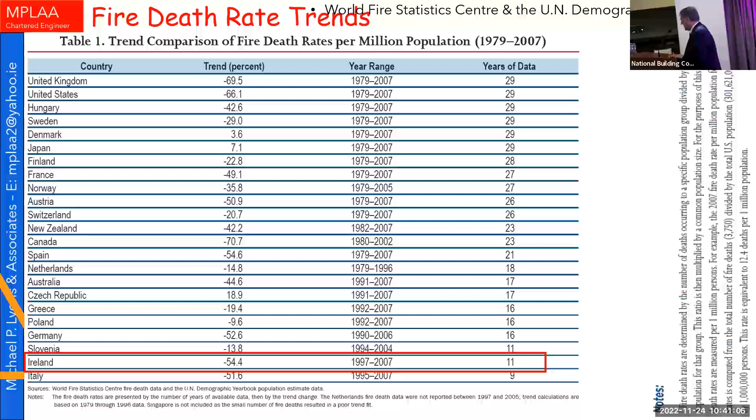Now, background to all of it is that we have our National Fire Safety Week, and as David Carroll referred to, there's a lot of emphasis on reducing the number of fatalities due to fire, and it's having very, very good positive results, even to the point that there's now a European approach to it, and there was a European Fire Safety Week on last week. The European Commission, while fire safety is a member state competence, is looking at ways of developing a pan-European approach, and do pay attention to it.

There's a group called the European Fire Safety Alliance that is organising that whole area, and it's very much complementary to the type of national fire safety guidance we're promoting in this jurisdiction. But the main dominance, of course, in terms of fire fatalities is dwelling fires.

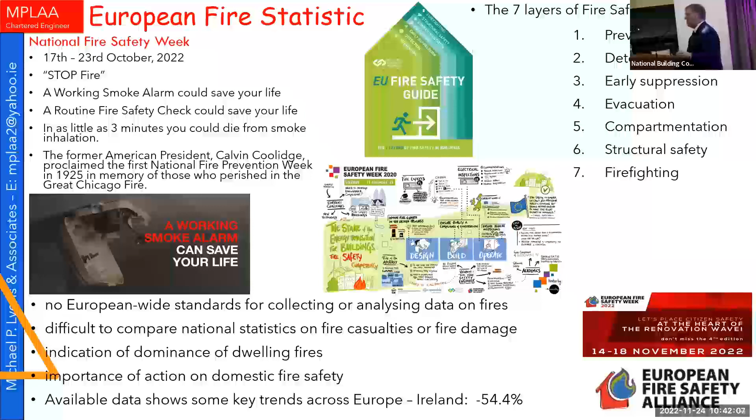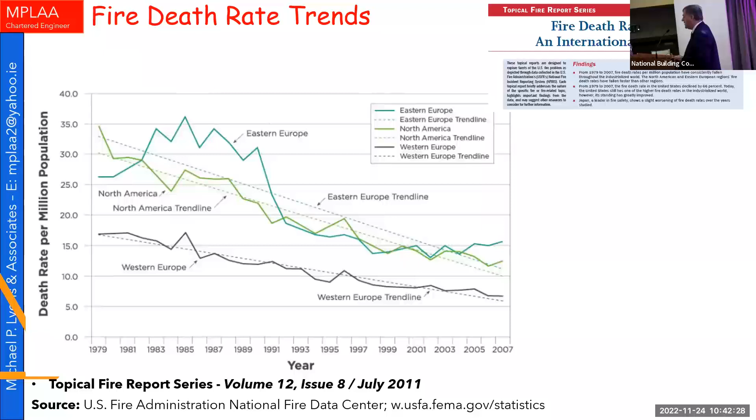The vast majority of our fatality statistics are not in commercial buildings, they're in dwellings, be it dwelling houses or non-dwelling house dwellings. And overall, even worldwide, the feedback is that the fatality rate is reducing all the time, and those statistics are taken from international trends produced in the US and even by the UN.

So it's important from our point of view to note that we are actually having a positive effect, and all of the increasing standards in terms of fire safety that have come in since 1992, 1998, 2006, again in 2017, and even the changes most recently in 2020 with open plan flats -- they are actually having a positive effect. The importance is for us to keep going in that direction.

The NBCO set me a very broad smorgasbord of issues to address in terms of fire safety strategies.

In the time that's going, I will be skirting through each of the 5 principal areas. It's going to go from means of escape right through the 5 principal issues in terms of fire safety design and fire safety construction, B1 to B5.

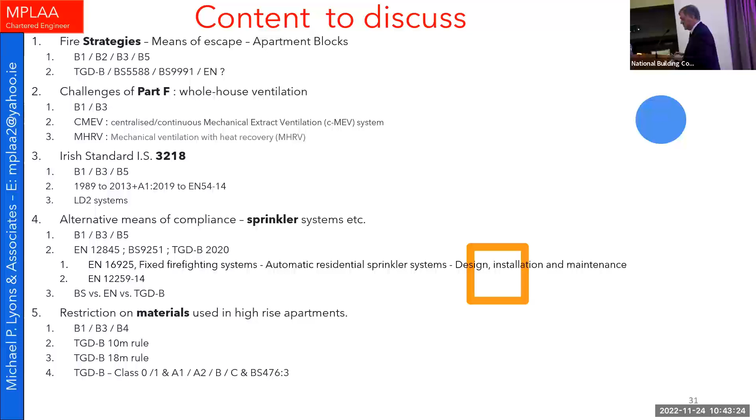We have our 2 guidance documents. The Act has evolved over the years, and there's even doubt as to what does or does not need a fire safety certificate. That's why it's important for all of us to attend these types of presentations, so those kinds of questions get out and the basis for the answers needs to be understood. We now live in an industry where there's 2 guidance documents, one for dwelling houses and then one for dwellings that are not dwelling houses.

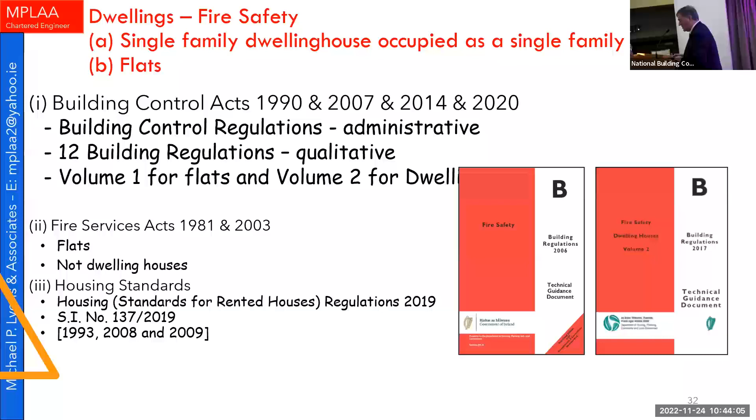It's interesting that the provisions for fire safety that do apply, for a 2-story house, one can jump from a 1st floor window as long as the floor of the bedroom you're trying to get out of does not exceed 4.5 meters off the ground. You can still hurt yourself, but in terms of complying with the building regulations, and the guidance that feeds into them, there is a limit.

In 1998, we brought in the obligation to have an escape window in all dwelling houses as an upfront obligation. Then in 2006, we reduced the size of the escape window because we're following British standards. It's important to note that our guidance is very strict in relation to the fastenings of those escape windows, and it's the details where things go wrong.

I think that's where a lot of building control officers need to pay their attention to, is to be familiar with the actual little details and to insist there's a positive confirmation that the designer is going to comply with those details. Pay attention to the paragraphs in the different guidance documents, particularly in the dwellings guidance document. If you can't open a window, you can't escape through the window.

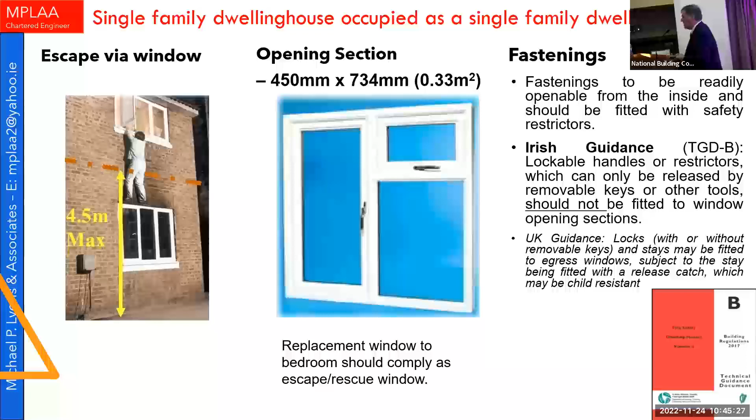Just a point in relation to attic conversions: the window out of a 2nd floor story is an assisted escape window. There's no expectation that the person is going to jump 6 meters from the eaves to the ground. The intention is that some external assistance, presumably the fire brigade, but it could be your neighbors or somebody in the household themselves, helps the person who is effectively trapped in the attic room, because why are they going out through a window in the roof space if they're not trapped?

Their alternative is to go down the main staircase of the house. You would assume that's what people would do. So if they're not able to use the first primary means of escape, they're going to use the secondary means of escape. But it's a rescue window for assisted escape because of the height that the person's going to be, generally anyway, above the ground.

That's why, as Owen referred to, there's that often forgotten obligation to have space underneath the window for a ladder. But you've also got to get the ladder into that space. We've got to be careful with what we allow, as rear gardens that don't have the facility for a ladder to be brought to the back of a house. You've got to question the means of escape concept being applied to the house if you're relying on assisted escape from an attic converted window.

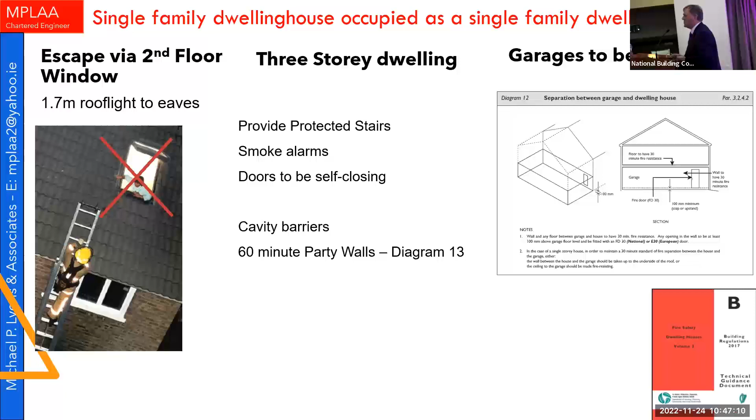As I say, we might have a lot of questions by the time we get to the roundtable talk, so I'll invite any queries that you may have.

One of the things that has also changed, particularly since 2020, is that for the first time we actually have an obligation that there must be a domestic sprinkler installation. We haven't had that before in dwellings. Now, it applies where you've got a 4-story timber-framed house, but it is now in our guidance. Other jurisdictions have brought in domestic sprinklers - Wales, for instance, have done it.

An awful lot in North America have done it, but we've been reluctant to start looking at it as an obligation. It has come in for open plan flats, and I'll come to that as we go through the other slides. But that whole area of bringing in an engineered solution to deal with shortcomings perceived when a fire occurs is available to designers.

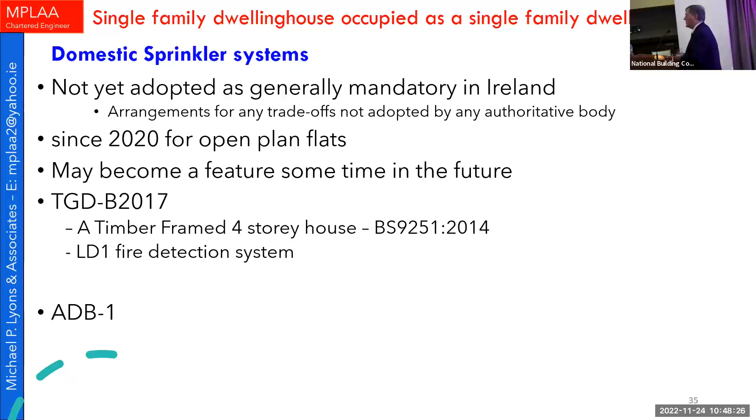Building control officers are going to be challenged to agree to those designs going forward as well. It may become an obligation in the future, but for the moment anyway, when it comes to domestic sprinklers, it's either open plan flats, elongated escape routes, or for domestic houses, it is timber framed 4-story houses.

So one of the things is just the very word dwelling - is dwelling house defined? It's in the technical guidance, but is it in the actual regulations themselves? What's a dwelling from a legal point of view if it's not in the building control regulations? And what does that mean for us?

It's very important to note the definition of flat. I think that's what goes to the answer to the question about the fire safety certificate. A flat is a dwelling that is horizontally separated from something else that's not part of the dwelling. And if that's the situation, automatically you're obligated to get a fire safety certificate.

I can remember when I was a fire officer, the shock on one person's face when she realized that the house she lived in was actually a flat, legally speaking, because she had her shop underneath her dwelling. It was a dwelling house in the 1800s, but it ceased being one when a commercial unit was converted into the actual dwelling house. So it became a dwelling over a shop - ergo, it was a flat over a shop.

People don't like their penthouses being called flats or their duplexes being called flats, but under the Building Control Regulations, they're just flats - dwellings which are horizontally separated. So you get into this thing of compartmentation. And again, that opens up the conversation about strategy, fire safety strategy in terms of design and compliance, and it starts to answer a lot of the questions that people will ask.

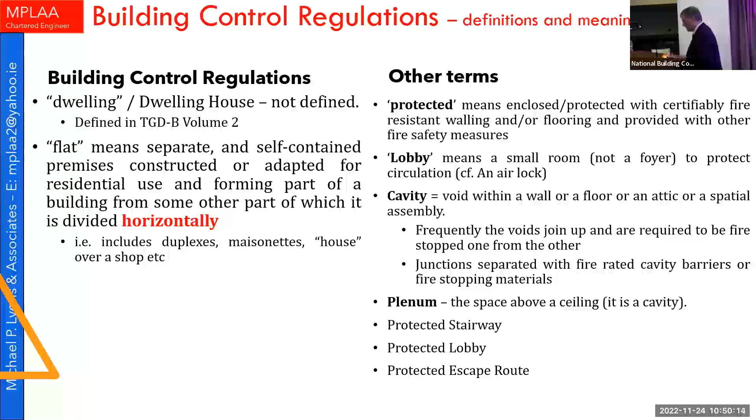One of the first things I always advise everybody to do when you start looking at fire safety strategies is to draw out the basic means of escape obligation - what you're proposing, or what somebody is trying to convince you to agree to - and characterize it in a descriptor. For example, a 5-story over basement block of flats with a single stairwell and with protected lobbies.

There's a bit of a shine on the - can we do anything with the shine, you know? Anyway, so you've got your enclosed stairwell that goes from ground level here all the way up to the top flat. And then there's a protected lobby box between that single stairwell and a fire in any one of those flats.

So your basic strategy is this: if this goes on fire, the fire's got to burn out of this box, it's got to go through your protected lobby, and then it's got to get into the protected stairwell that all the other users make use of.

The other basic thing to keep attention on in your strategy is that your basement is separated from the vulnerable single escape route. Because the fundamental concept in most fire safety design is that there's an alternative means of escape - I'm presented with a fire, I turn my back to it, I walk away from it, I can go somewhere. But that doesn't work everywhere - you have to end up having single escape routes, so our strategies have got to be able to deal with those.

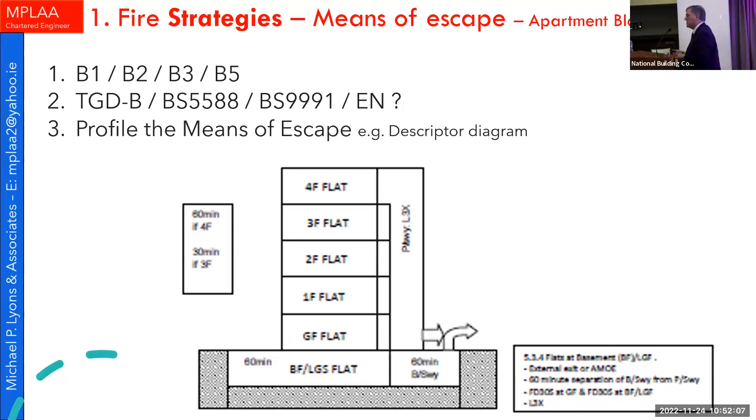In the future, there may be a European-wide standard that will replace all of those regardless anyway. So in terms of the volumes and guidance we're following, currently it's Technical Guidance Document B - the prima facie route - Technical Guidance Document B plus BS 5588 Part 1 as your strategy in terms of fire safety for flats. And BS 5588 Part 1 is from 1990.

Flats and designs and materials and facilities and complications of apartment blocks, and even housing estates, have become far more complicated, and the issues that arise - a lot of things aren't mentioned in it. A lot of designers are using 9991, and a lot of building control authorities are agreeing to allow for it as well, as long as it's used in its entirety. Appeals to An Bord Pleanála are regularly based on arguments about the guidance in 9991.

So there are issues that do arise that have to be addressed. The biggest one, I suppose, really is the 10-meter rule for us to pay attention to - Ireland has this requirement that compartmentation above 10 meters must be in non-combustible materials.

And you can't get around that. That is the Irish state through TGDB saying this is the standard you must comply with. So you can try to go over to use Approved Document B or something else to get around it, but An Bord Pleanála hasn't allowed that.

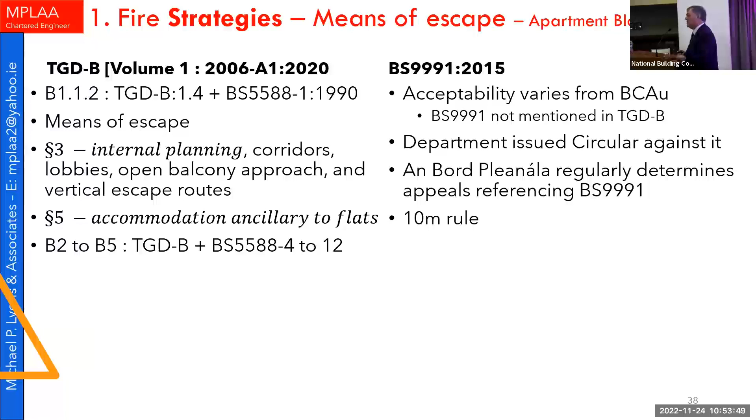In terms of basic design, a fire occurs in a room. It's got to get out through the doorways, into the corridors. You've got to protect your corridors, stairwells, and entrance hallways - they're all spaces for the products of combustion. When I say fire, I mean fire, smoke, heat, toxic gases, all the products of combustion. We deal with it by having these spaces with fire doors to protect the single means of escape.

In terms of specification and construction, we have to ensure that what was intended by the test performance of the products is delivered on site, and what has been promised by the manufacturers is able to be delivered by the construction team - not alone just the design team, it's the construction team as well.

I always point out that in the building regulations it's a twofold obligation. When somebody says something is compliant with building regulations, they're saying it's compliant in terms of design, but also compliant in terms of construction - it's both design and construction. So if you as a building control officer are agreeing that something is compliant, you're agreeing that both the design and the construction comply with the building regulations. It's an interesting clarification just to pay attention to.

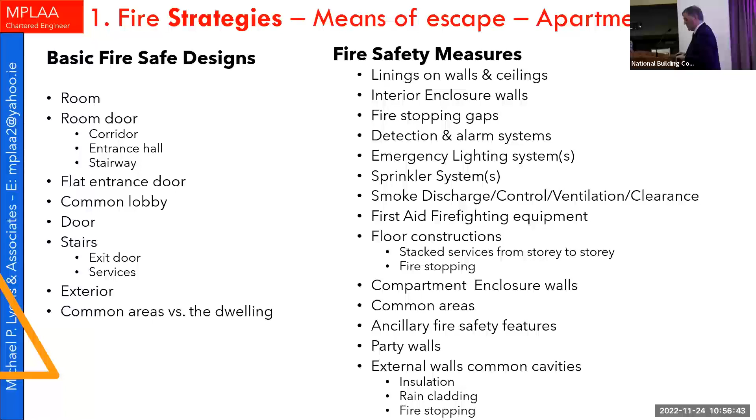The party wall must be upgraded if it doesn't already meet the requirements of Part B. A lot of the time, houses or apartments where an attic is converted won't have fire stopping across the head of the party wall, and TGD B is very clear as to how to do that.

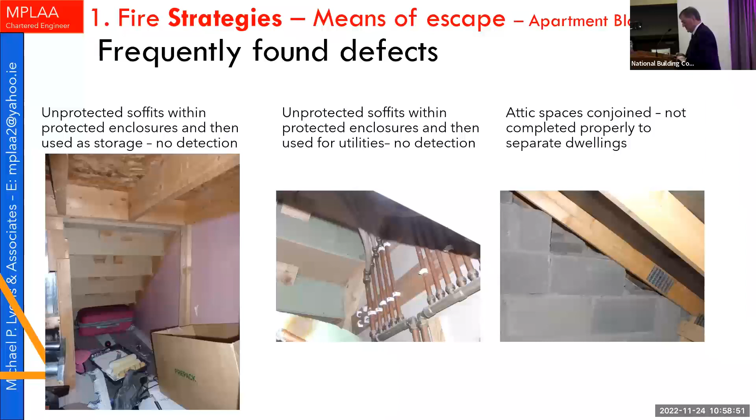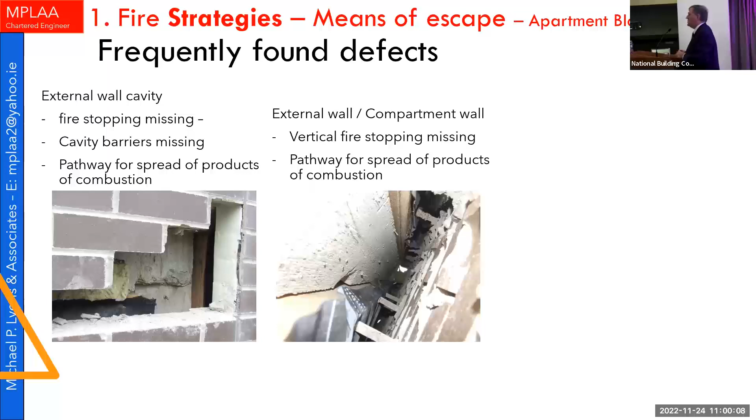Easy for fire spread to go. Often we find that small details like fire doors aren't fire stopped around their openings, that people rely on architraves, and architraves aren't a recognized form of fire stopping.

That kind of detail must be confirmed by the construction team, that they've finished the fire rating of the wall. There's no point having a fire rated wall, having a gap, and then a fire rated door set, because all that'll happen in the fire is that the heat and smoke will be pushed through that gap between the fire rated wall and the fire rated door set. So it's important that gets fire stopped.

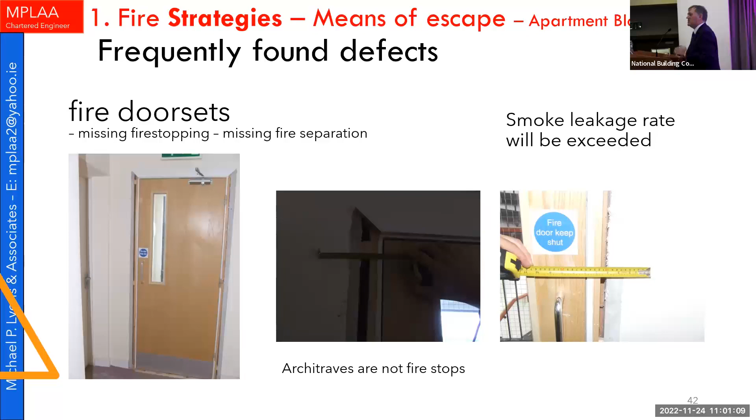Sometimes the gap may be 1 millimeter, maybe 2 millimeters. You can take a view on that. But if the gap is 10, 20 millimeters, as you can see in this photograph, that's quite considerable. Much easier for a fire to push its smoke through that gap and start filling your means of escape.

Invalidating the fire safety strategy. And frequently, the defect that we keep coming across in apartments particularly is where the entrance hallway, the corridor inside the flat, was meant to be a protected corridor.

What do we mean by protected? It's just a qualifying term to say that it is a lifeboat within the flat. It's a fire-resisting walled enclosure, but it's got to be walled from fire-resisting floor to fire-resisting soffit of the compartment floor overhead, because that's one of the 2 strategies allowed in TGD B, that your entrance hallway is built vertically from floor to floor.

The other strategy is that your entrance hallway wall is brought up to a fire-resisting ceiling that is treated as a fire-rated cavity barrier, but then every ceiling in the dwelling becomes a fire-resisting cavity barrier throughout the flat, as the guidance says.

So it's the ceiling in the entrance hallway, the ceiling in the bathroom where you've got vents, the ceiling in the bedrooms, in the living rooms, throughout the flat. So it's the ceilings right out to the external wall, to each of the compartment walls that delimit the demise of that dwelling itself. That's a big challenge from a construction point of view to get right, and from an inspection point of view.

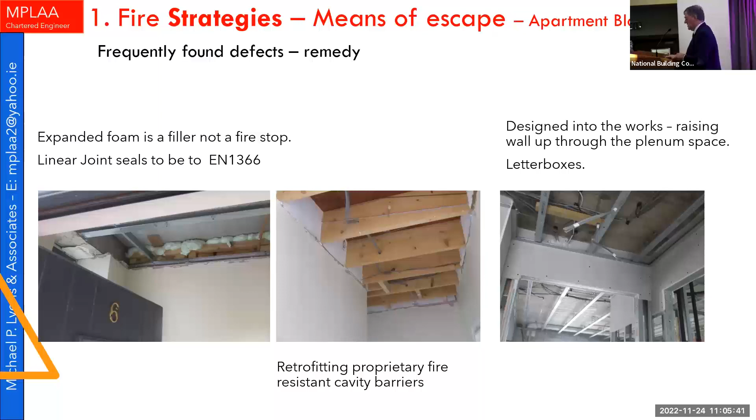Most of the defects we find from the 2000s onward are because constructors left protected shafts till the end. They left their service enclosures until the end, whereas they're far better off building them first and then fitting in the different penetrations. But we can come back to that in our round robin talk.

But the problem is that when you open a lower door like this and the smoke rises up through the shaft, if you're faced with the same situation where there are gaps between the door frame and the shaft wall in the upper floors, the smoke that's meant to be leaving the building is going to seep into the corridors up above, and those doors will pop open, undermining completely the intention of your fire door protected smoke shafts.

Another thing that arises is that people build their fire resisting services risers, which are meant to be protected shafts, but the walls are really just built as casings, with a stud and plasterboard on one face, decoratively nice to the outside world, so it looks compliant. But the problem is the fire is inside the shaft, and the plasterboard isn't facing the fire. It's a casing, not a wall.

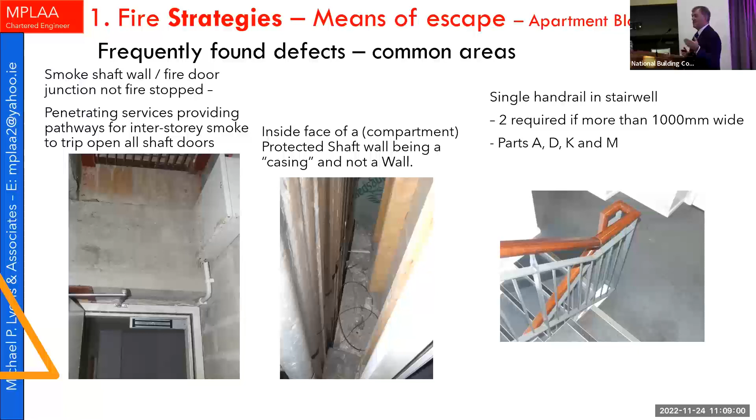Now there's a whole load of standard defects that show up when it comes to means of escape, and I've listed a number of them: fire-resistant ceilings that have holes in them that don't inhibit fire spread, smoke alarm systems not adequate for whatever reason—I'll come back to some of the details on that—and external walls with cavities that would need either cavity barriers or full fire stopping.

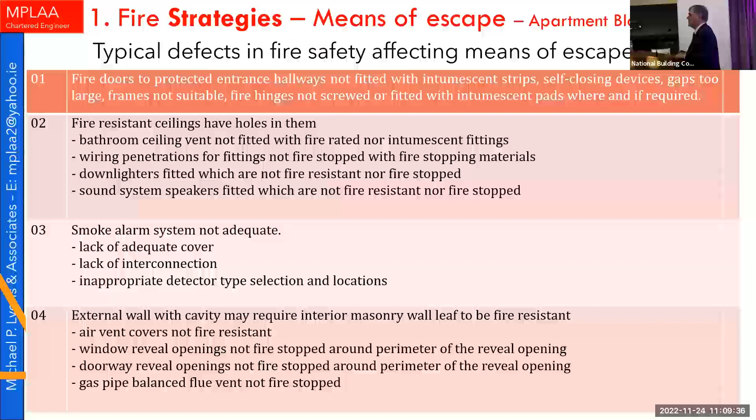The whole thing of finishing our construction so that you deliver goes back to a question asked earlier, having a cavity barrier strategy in your design is something frequently neglected by designers. It's kind of an afterthought, even when fire safety cert applications are made. Not showing where the fire resisting cavity barriers go on your drawings is a bad idea, because things like the cavity barrier at the head of a wall are omitted, cavity barriers or fire stopping at intercompartment floors are omitted, and cavity barriers around window opes are omitted. It should be clear from the very beginning of your design what strategies you're going for to inhibit fire spread.

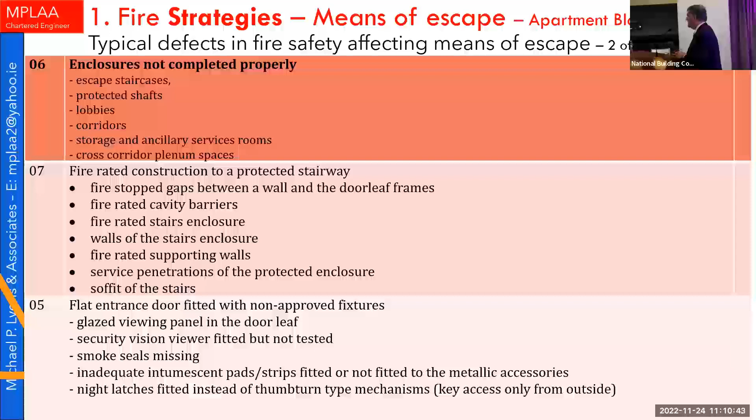Technical guidance document B or BS 5588. These are the standard advisory drawings from 5588 for the common areas in flats. The critical kickoff point is the 11-meter high rule, and there's 2 measurements that are frequently got wrong. When it comes to means of escape, the height referred to is the finished floor level of the occupied story. When it comes to the height of a building, it's the mean roof level, not the top occupied story.

But for means of escape, it's the height of the finished floor level of the top story. And whether we provide the strategy based on providing a common lobby on a single escape route, single staircase. Keep in mind the fundamental concept is that there should be 2 staircases. It's a permitted relaxation to have a single escape route, but you have a single escape route because you do something extra. That extra is your fire protected lobby between your single escape route and the compartments that are on fire, the flats.

The only exemption allowed, which didn't come up, is where you've got 2 flats on a small building. A small building under the 5588 strategy is an 11-meter high building to the top floor level. The simple reason it's called a small building is that the fire brigade can get to it. Fire brigade ladders carried on their engines can actually be brought up to the top window for an 11-meter high building. If you go above 11 meters, that's their longest ladder, if they can physically get it in.

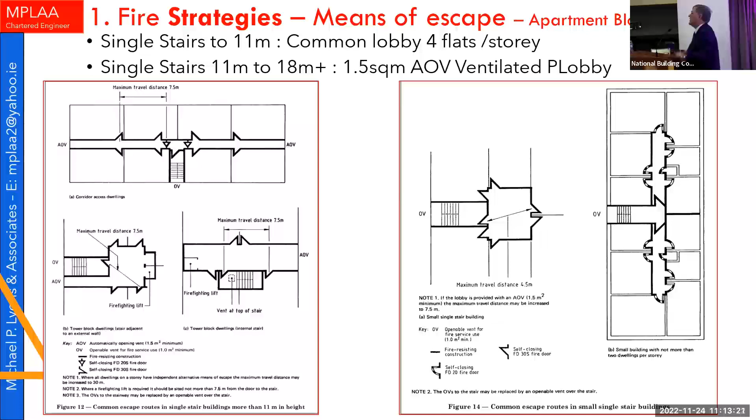I only know of 1 county council that's ever asked about fire brigade firefighting ladders up front. It was Monaghan. They insisted on being told that fire brigade firefighters could get a ladder up to the outside of the building. Everybody else presumes you can, but if you don't put it into your design documentation, people are going to forget about it. The 11-meter rule comes from the idea that the 13.5 meter ladder, which is at a slope, is able to be put up to the outside, to the topmost window, and the fire brigade can get up to that window where somebody might be stuck in their flat and take them out. Very basic, simple strategy.

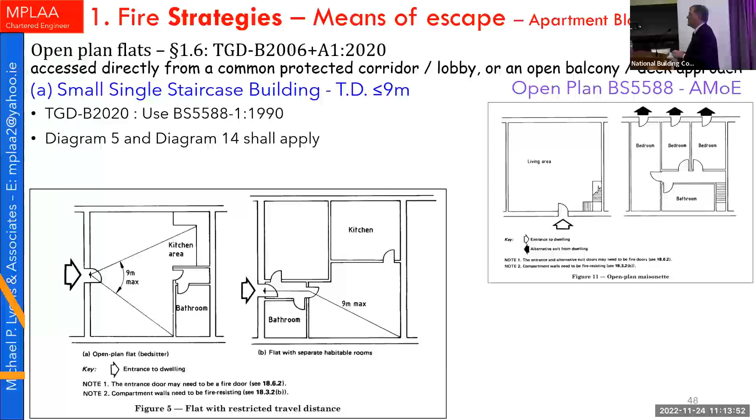So the layout of open plan is the biggest innovation we've had since 2006, allowed in 2020, provided you provide a domestic sprinkler system. Now, open plan flats were allowed as bedsitter type flats as long as the travel distance was less than 9 meters. But the big innovation is to have bedrooms which are inner rooms - we haven't had that before. The only reason it's allowed is because domestic sprinklers must protect the escape route from the inner room bedroom to the front flat entrance door.

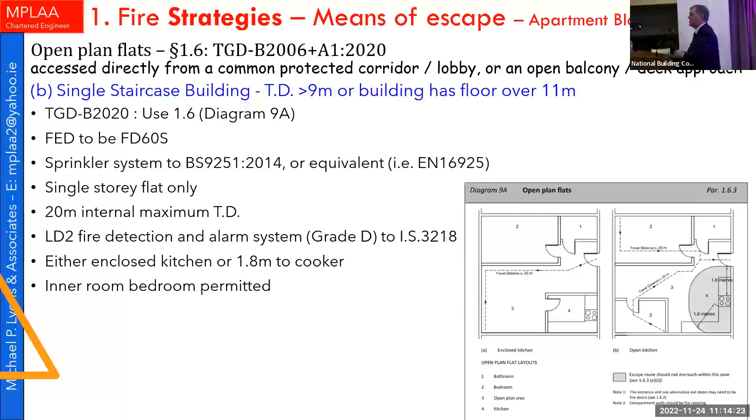There's a number of other obligations. You must provide an LD2 smoke alarm system. You must keep it a certain distance away, 1.8 meters. The overall travel distance can't exceed that dead end of 20 meters from the furthest point of the flat to the front entrance door. So they are significant, the other obligations.

The other thing that's been allowed is extended corridors. The simple rule of that single dead end escape route is you can't turn your back on the fire, you've got to keep going in one direction. The old rule was you had a dash distance from your flat entrance door through a lobby to the stairwell of 4.5 meters. The simple idea being if someone's flat goes on fire, they open the door, smoke comes out, gets into the protected lobby, they close the door because it's a self-closing fire door. You open your flat entrance door and you're faced with a little bit of smoke in the lobby, but there's only a short dash distance of 4.5 meters to get out of the protected lobby.

That can be lengthened to 7.5 meters if you put in a big AOV, an automatically opening window vent, 1.5 square meters. In 2020, we extended that distance to 15 meters, provided you still have your AOV on your 15-meter common corridor, but now your neighbor's flat and your flat must all have domestic sprinkler systems. That's a big change, and a very welcome one.

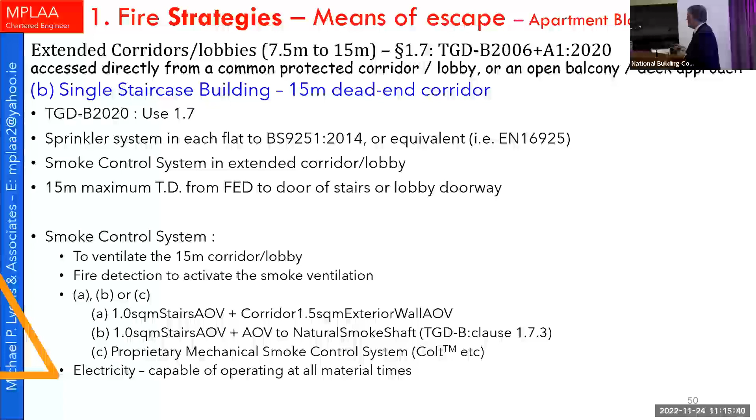So the second thing I want to comment on is Part F and the challenges it throws up. The first thing that should really be there is you build your protected enclosures, your protected stairway, your protected entrance hallway first. Then you fit your ventilation system around that. Fire safety comes first. You're going to want to duct warm air around a dwelling, fine, but if you're going to try and go through the fire-rated enclosure for means of escape, fire safety comes first. Try to avoid going through that protected enclosure and treat it like the protected lobby.

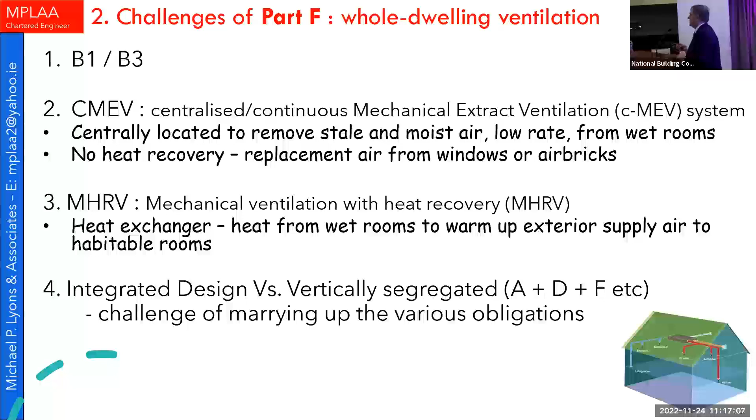One of the things that's very important in complying with Part F and Part B is that the design team needs to integrate, obviously, structure, materials and workmanship. But F and B need to work together from the very beginning. They need to agree an integrated design. I'd say the first place to start is do your fire safety enclosures first, then fit your ventilation system around that or through it. But it certainly needs to be considered because you're going to penetrate the fire resisting enclosure.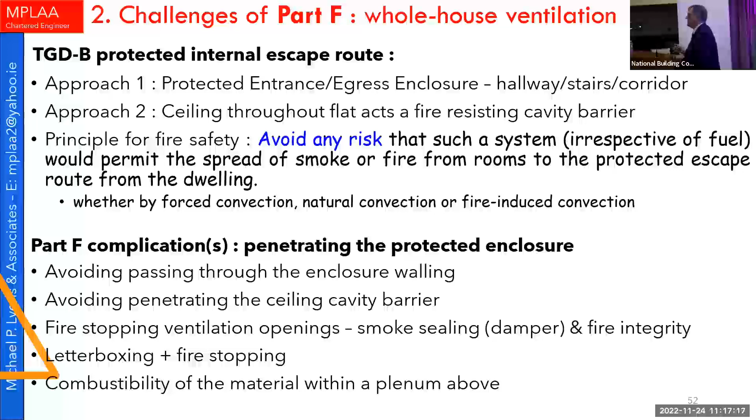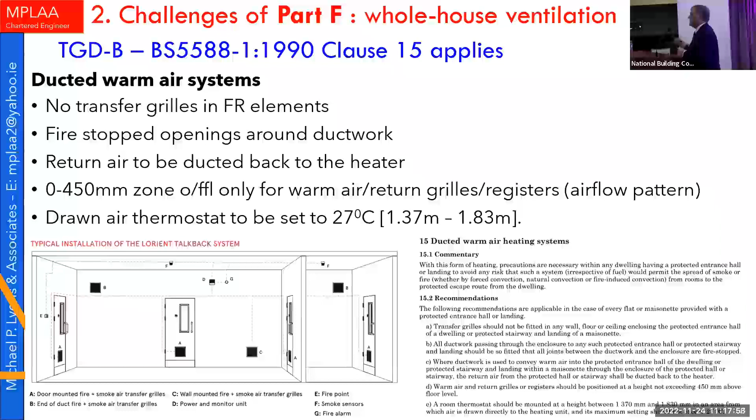There is a lot of guidance available. BS 5588 Part 1 does talk about ducted warm air systems, again on the principle of don't penetrate the enclosure, and if you must, there are serious limits on it. Technology has moved on. Fire alarm activated smoke dampers are now available. It makes your ducted air system a whole lot more expensive if you're going to try to go through these enclosures. So if you can avoid it, but there are solutions to doing it. They're all triggered by your smoke alarm system, so your smoke alarm system starts to become very, very important.

Irish Standard 3218 is the national standard for fire alarm systems, primarily for commercial fire alarm systems, but it now includes a section on domestic smoke alarm systems as well. And the standard for us has gone to LD2 - life domestic, level 2. Every room has a detector head, more or less. A big change we made in 2019 was that every bedroom must have a detector head. It took from 1992 until 2019 for it to be clearly, categorically laid out that a bedroom must have a detector head in a dwelling, in flats certainly.

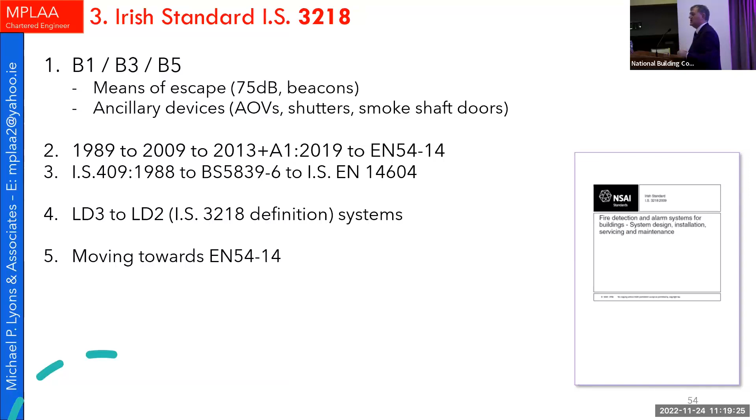It was inferred in dwelling houses, but it took quite a while for people to realize that detection is really important. Getting people out of the place that they're in is the primary purpose of fire safety standards. And warning people to leave, whether they leave or not, is another argument. But we've gone from standalone domestic smoke alarm systems originally in 1992, or not even a system, just a fitting, to an interconnected LD2 smoke alarm system, intending to wake everybody up.

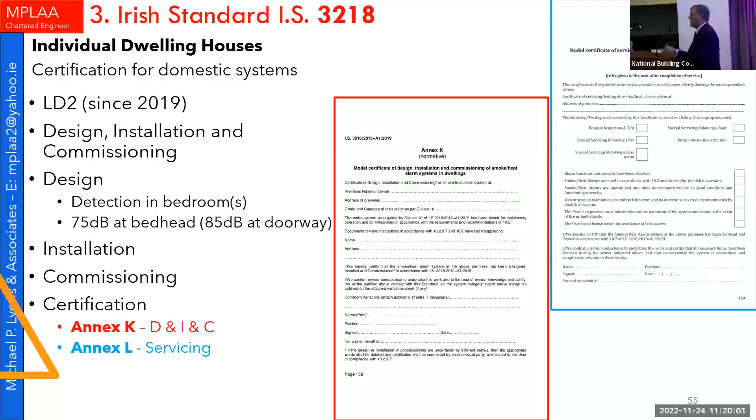What's very important is that they're properly certified. There is a pro forma certificate in IS 3218 for domestic smoke alarm systems, and every such system should be designed and certified as being installed in accordance with IS 3218. It's not that complicated to get it right - it's a consumer unit connected system. And there are two certificates available, for the handover at installation and then the annual servicing one. That should become the norm.

So you're asleep in your attic - and it goes back to the comment about the habitable, non-habitable storage attic conversion, I don't believe a word of it, they're all bedrooms, I've yet to go into one and see that it's not a bedroom. People put the most precious people in their lives, their children, into these attic conversions. And you're up in an attic conversion and there's a fire in your utility room - the only thing that's going to warn you is this LD2 system. So if they're not getting that right, everything else is meaningless. Fire stopping, cavity barriers - if you don't warn people at the most vulnerable location in their dwellings that there's something wrong close to their fire exit door out of the dwelling, we're getting it wrong.

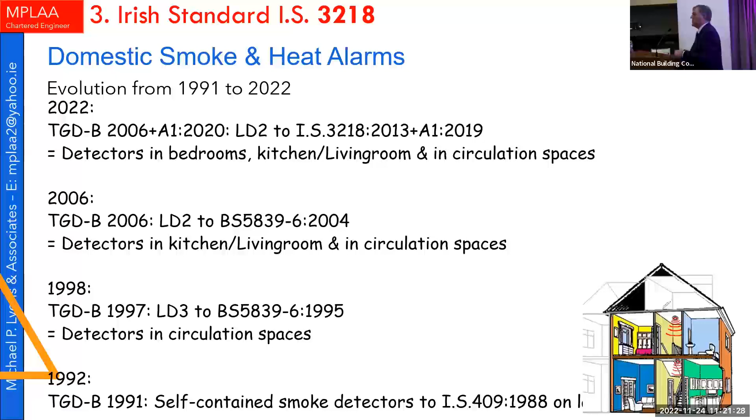So when it comes to apartment blocks, the Type M system, the manual fire alarm system, is a minimum obligation. It is practice in this country that you provide an L3X system, which is every flat interconnected commonly with a heat detector head inside the flat. And that's what 3218 looks for.

Now, Technical Guidance Document B is a little bit more forgiving when you've got non-combustible floors, but generally most fire officers will look for an L3X system. I, as a designer, will automatically want my client to put in an L3X system. Technically speaking, if they have non-combustible floors, TGDB lets them off the hook.

And they have to put in a Type M system. Now, the fire detection alarm system might have to do other ancillary activities like pop open smoke vents, so they've got to provide detection in the common areas for that purpose. But TGDB at the moment does allow common areas of apartments not to have an L3X system if they have non-combustible floors. Keep an eye on that.

I reckon within the next 10 years, certainly after the Grenfell Tower report gets done, there will be a general perception that you will have to provide it. And I think most insurance companies want there to be common detection systems as well. So I think it behoves everybody to pay attention to that.

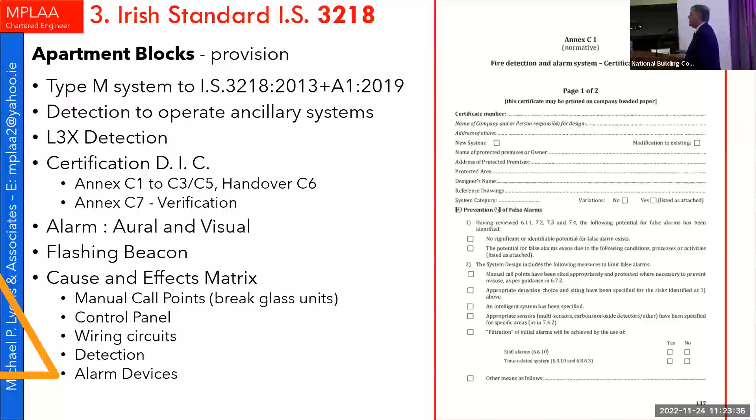And it's clear in 3218 that it has to be done by the design team. And then there's a suite of certification that goes along with all of that as well.

Then just a word in relation to alternative means of compliance. There's a plethora of codes of practice in relation to various systems. But when it comes to alternative compliance approaches to Technical Guidance Document B, the vast majority of buildings don't warrant going anything different to Technical Guidance Document B and its suite of codes of practice. But there are buildings which do benefit - tall and complex buildings benefit from having an alternative approach.

TGDB does refer to the American code, the NFPA code, the CIBSE guide, but primarily to the British standard 7974. And 7974, while it is a British standard, is internationally recognized as an alternative approach to prescriptive design, which is Technical Guidance Document B.

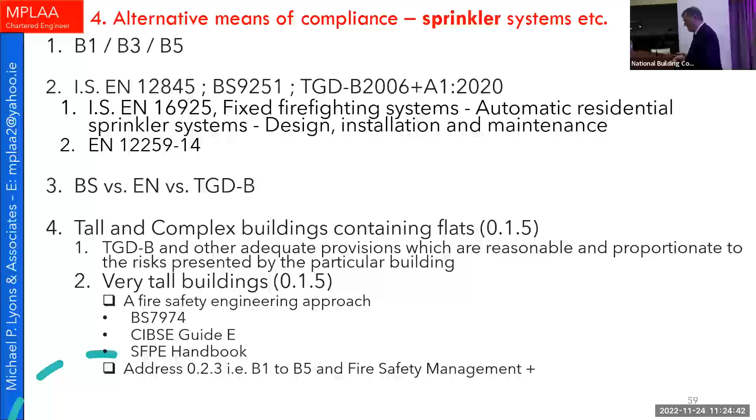But as an alternative approach, it requires the designer to do an awful lot of groundwork. And all of that information has got to be collated - they've got to recreate the entire fire safety picture that you take for granted with Technical Guidance Document B, and they've got to interrogate the design to develop a strategy.

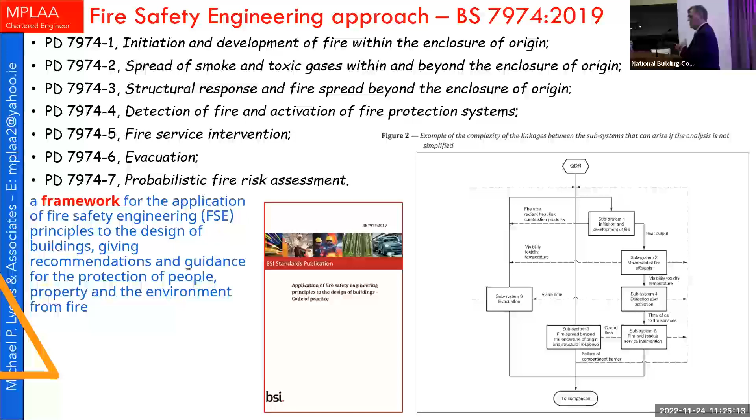And they've got to answer all the issues like the fire science of fire loading, the reaction of the building, the means of escape, the evacuation of the building, fire brigade intervention - put it all together in a package of information, review it, and agree that it meets the building regulations. Building regulations don't change - B1 to B5, still the same, irrelevant of which code you're using to comply with it. The legal obligation is B1 to B5.

The legal obligation is not to comply with Technical Guidance Document B - that's one way of complying with it. 7974 is another way of complying with it, but we're very lucky in this country - you've got to get a fire safety certificate.

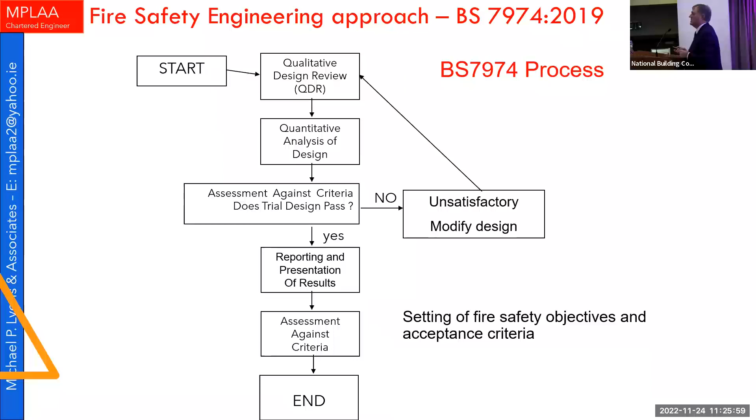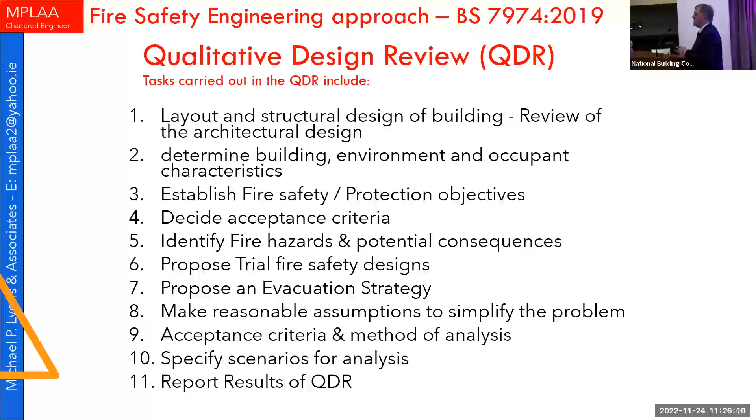So Sarah and her colleagues and David Carroll have got to be convinced by your 7974 solution that you're coming up with the equivalent of Technical Guidance Document B. You've got to go through the hoops - the details of it for today aren't all that important, but there's a big design process to go through to assess your design and come up with the same outcomes you would have if you complied with Technical Guidance Document B, because the outcomes are to comply with the building regulations, Part B.

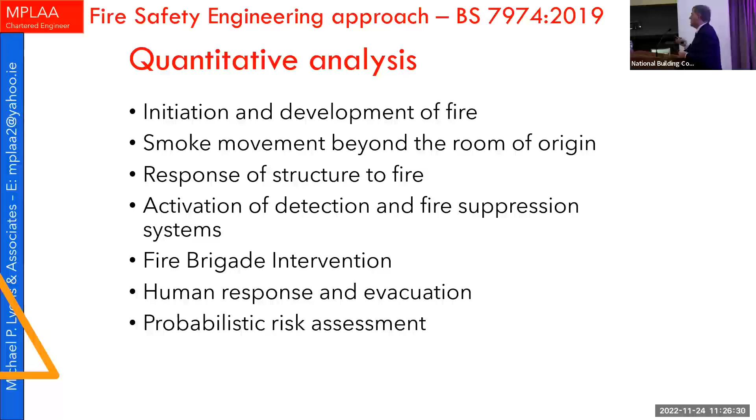So it behoves the designers to come up with some very, very good, technically convincing data to show that they have the same level of fire safety achieved. And it has been done.

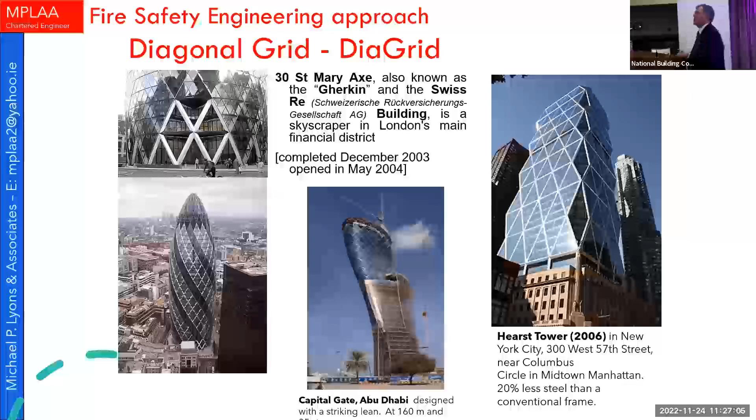It's been done internationally. Here's a couple of photographs of different buildings where it's been done. Particularly, I like the Gherkin in London, that's a particularly nice one. And those ones, the structure is on the outside of the building. Very complicated, open plan. A lot of them rely on sprinkler systems, on very innovative smoke control solutions to keep the fire away from the evacuating people. But they are available to us.

And then just the last thing I'm going to talk about is materials used in high-rise apartments. I've quoted the chairperson of the Grenfell Tower inquiry, Sir Martin Moore-Bick, and he pointed out in the first phase report that there was compelling evidence that they didn't get it right when they looked at the materials they were using in the refurbishment of the tall building. And not only that, they knew they weren't getting it right. Some elements within the design and construction team knew they weren't getting it right, but blazed ahead anyway.

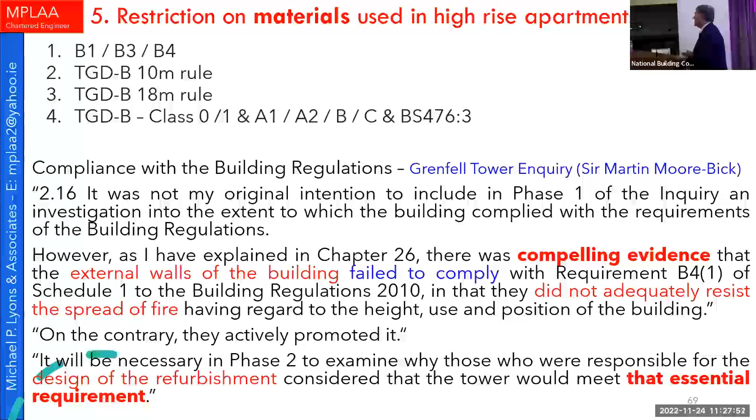Now, that's frightening. Why is it important to us? It's important because there's problems ahead with complying with Part B of the building regulations, and problems ahead with going through Technical Guidance Document B, because the guidance in Technical Documents B goes back to 2006 when it comes to having these conversations.

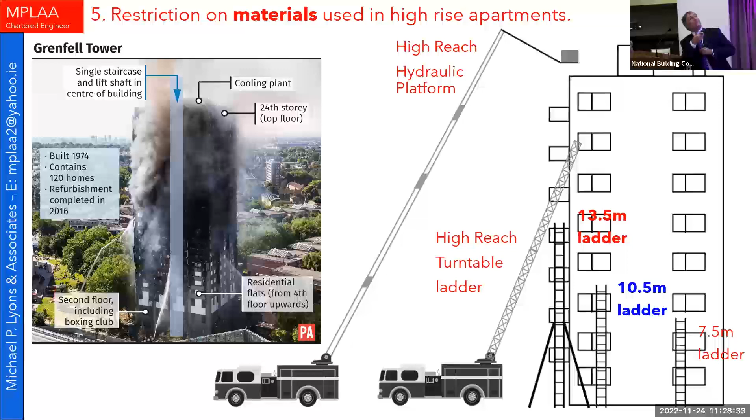And a couple of things just to remind everybody of: the photograph of the Grenfell Tower on fire, it's 24 stories high, relying on a single staircase. So you're up there, you have one way to get out of that building, one way to get from up there all the way down, because jumping out is not an acceptable solution.

And it was too high for fire brigade vehicles. The general thing with the fire brigade is that they have a small ladder, they've got a 10.5 ladder, and their biggest physical ladder that it can physically carry is 13.5 meters. That's the 10-meter rule. They then have other high reach appliances, but they only reach so high as well. So you're very much relying on the fire safety strategy for the tall buildings to get them right.

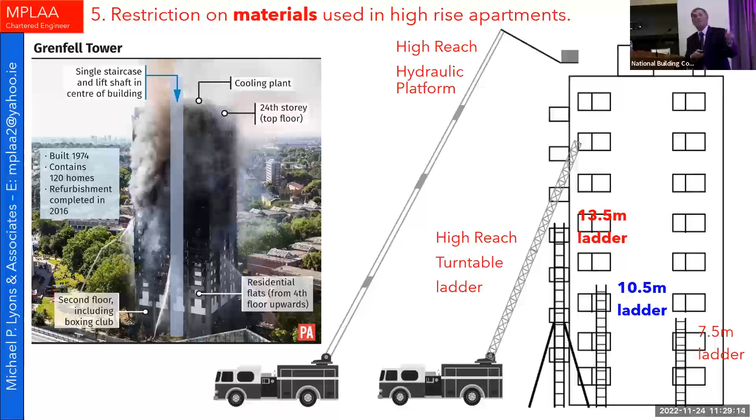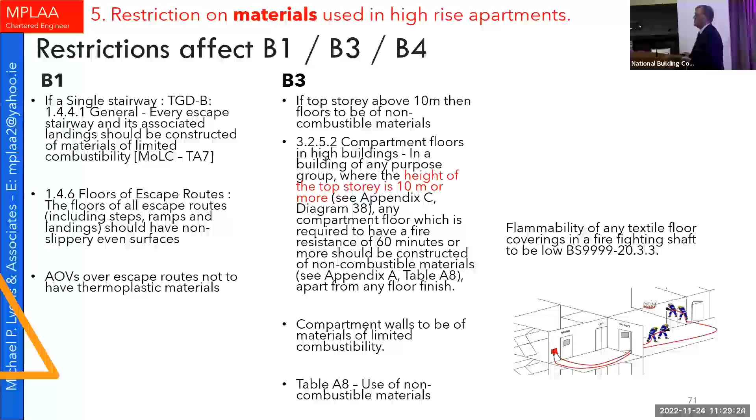And the tall buildings go wrong when you use the wrong materials. That's why there's significant restrictions on the materials that go into tall buildings, because with your single escape route, you are really vulnerable in a tall building. I've mentioned about the standards for the 10-meter rule, that you have to have non-combustible construction. Another one that's missed is that if you have a story above 10 meters, all your compartmentation materials in the walls have to be materials of limited combustibility. Timber is out. Plasterboard's allowed because it's a material of limited combustibility. The paper on our plasterboard, unfortunately, means it can't be classified as a non-combustible material.

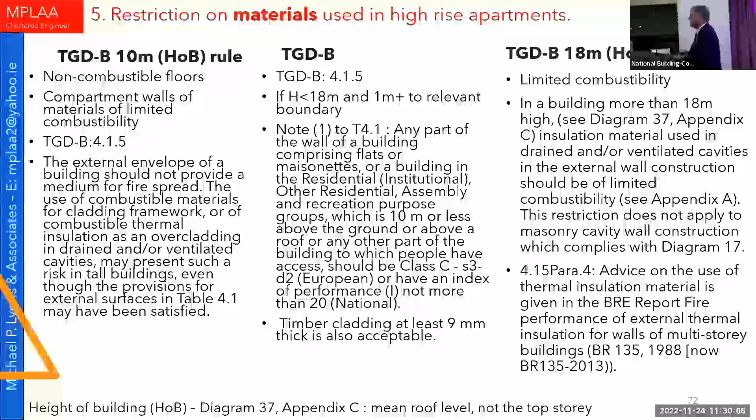And the last point I want to make is that Technical Guidance Document B, like Approved Document B in the UK, relies on a classification system and a fire testing system. The current version of TGDB refers to a report called BR 135, 1988, which was the first edition. This was for external wall, the combustibility of facades, particularly rain screen facades.

It was replaced by a second edition, and then a third edition. And only last year, the publishers of it, BRE, have separated themselves from the British Standards Institution on the guidance they give. They now say you must comply with the BS standard and be very careful relying on and interpreting the extrapolation from somebody passing the BR 135 system, all because of what they've realized as a result of Grenfell.

When you do a test and you've passed these codes, the test tests your rain screen cladding system on a 9-meter high wall. There's no window openings. So tell me any apartment block that has a 9-meter length of wall with a fire burning on the outside that doesn't have a window opening.

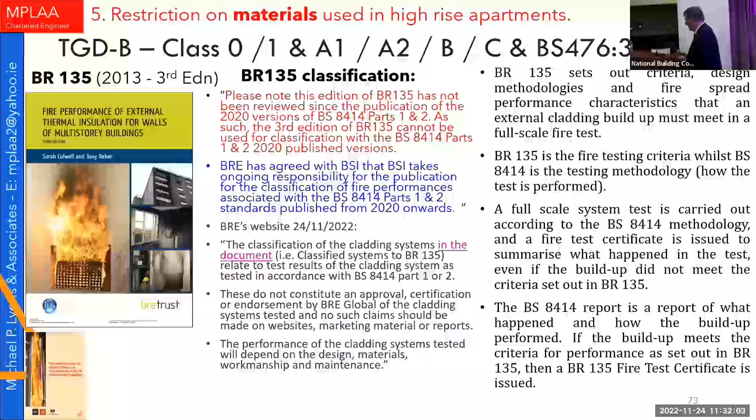And on that, I will just keep in mind Grenfell Tower and the lessons learned from it. And I would advise everybody to listen to the Grenfell Tower inquiry videos on YouTube. Very, very informative.